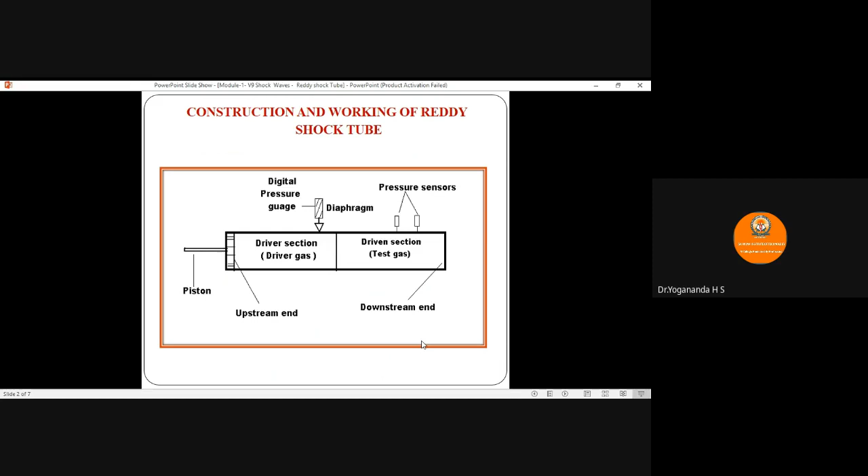In this video, we discuss the construction and working of the Reddy tube. In the diagram, you can see the structure of the Reddy shock tube. It consists of a long cylindrical stainless tube of 1 meter in length and 30 mm in diameter. The tube is divided into two sections.

One is the driver section, the other one is the driven section, separated by a thick aluminum or Mylar or paper diaphragm of thickness 0.1 mm. The far end of the driver section is fitted with a free piston, called the upstream end, and the far end of the driven section is a closed end, called the downstream end.

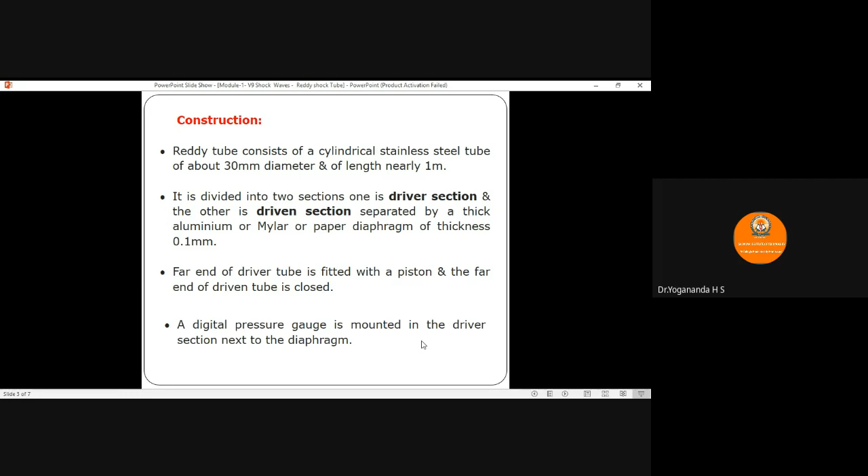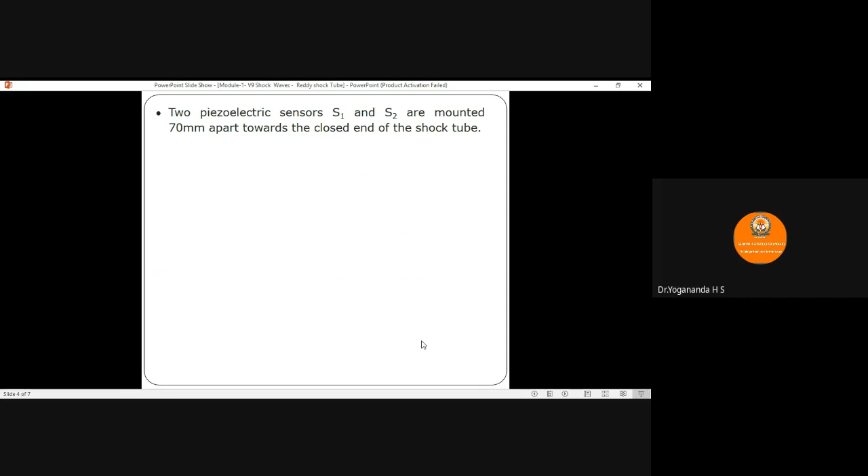A digital pressure gauge is connected next to the diaphragm in the driver section, and two piezoelectric sensors S1 and S2 are mounted 70 mm apart towards the closed end of the shock tube. A port is provided at the closed end of the driven section for filling the test gas of the required

pressure. The driver section is filled with the driver gas, which is at relatively high pressure due to the compressing action of the piston, and the gas in the driven section is called the driven gas or the test gas. This is about the construction of the Reddy shock tube.

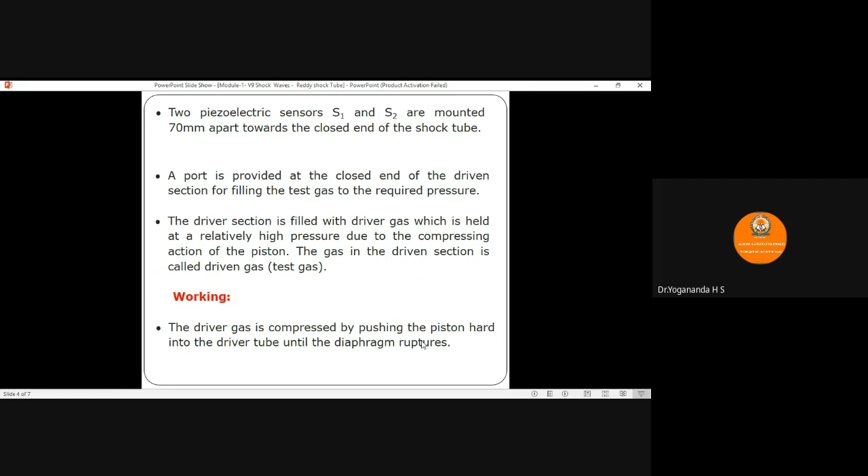Moving on to the working: you push the piston into the driver section until the diaphragm ruptures. Once the diaphragm ruptures, the driver gas moves to the driven section and pushes the driven gas towards the downstream end. Hence, there is a sudden increase of pressure, temperature, and density of the driven section near the downstream end.

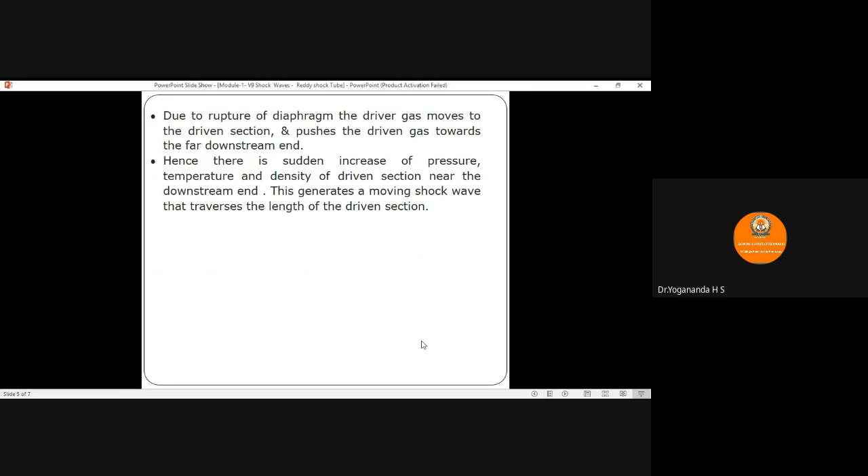This generates a moving shock wave that travels the length of the driven section. The propagating primary shock wave is reflected from the downstream end. After reflection, the test gas further undergoes compression and produces secondary shock waves, which increase the pressure and temperature to still

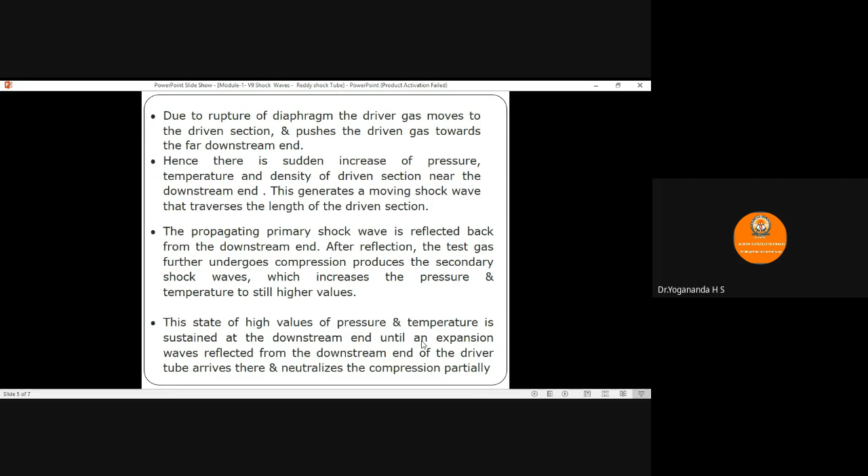higher values. This state of high pressure and temperature is sustained at the downstream end until an expansion wave reflected from the upstream end of the driver tube arrives there and neutralizes the compression partially. The period over which the extreme temperature and pressure conditions at the downstream end are sustained is typically of the order of a few milliseconds.

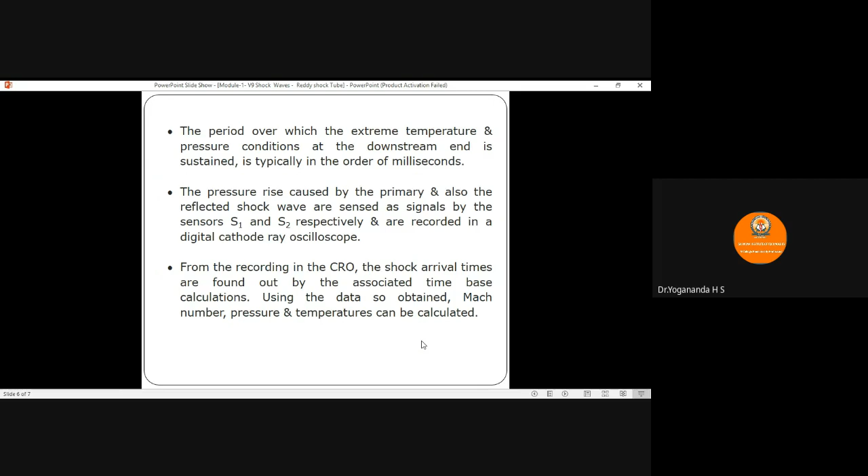The pressure rise by the primary and secondary shock waves is sensed by the sensors S1 and S2 and recorded in the digital CRO. From the recording in the CRO, the time taken by the shock to move between sensors S1 and S2 is noted. Using the data, the Mach number, pressure, and temperature of the shock waves are calculated in the Reddy

shock tube. The characteristics of the Reddy shock tube are: it works on the principle of a free piston driven shock tube. It is a hand operated shock wave producing device. The Reddy shock tube is capable of producing a Mach number exceeding 1.5. The rupture pressure is a function of the thickness of the diaphragm.